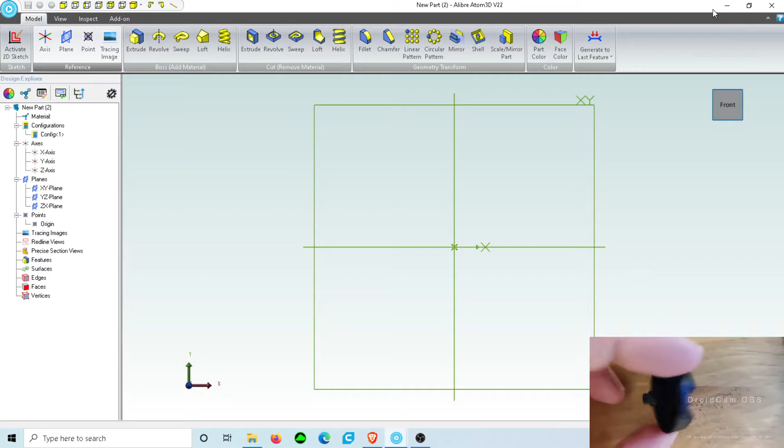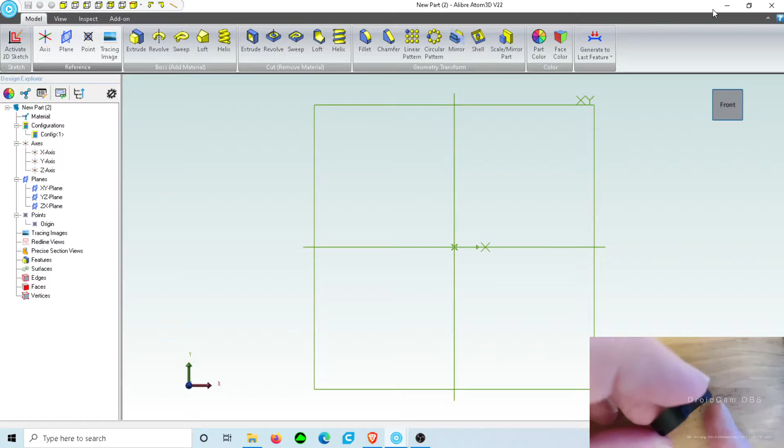The part we're modeling today is this D-pad hat thing. Came off, I think, an old Tartarus. It's not what the current D-pads look like, but really what I'm wanting to do is get the profile of this, because what I'm doing is I'm going to make a D-pad for a drop-in replacement for Tartarus and Orbweaver. So the first thing I do is trusty calipers.

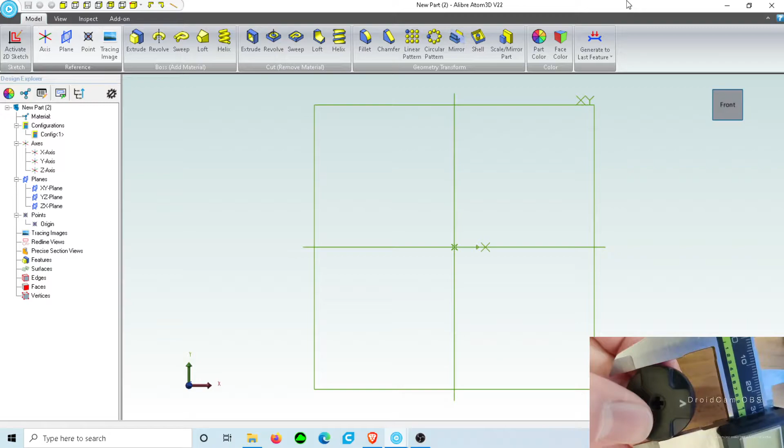Let's measure the diameter. We're at 27.6, so we'll just call it 28. We'll round up.

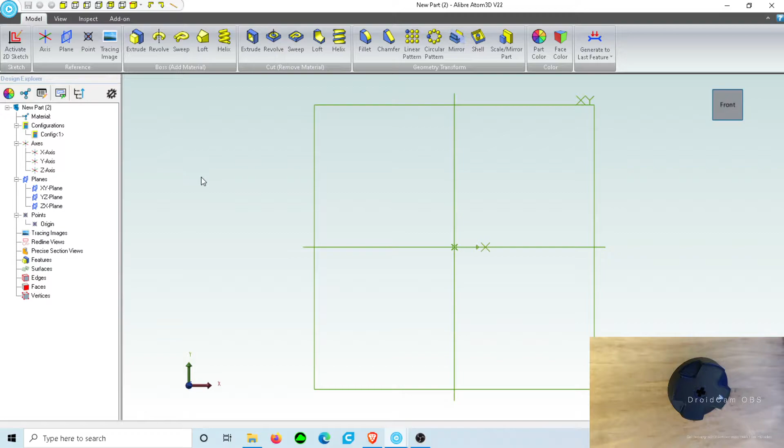And I'm going to make a sketch here. This is parametric 3D modeling, by the way, so a lot of the terminology that I use is going to be transferable between different apps. So I'm going to make a sketch on the XY plane, and we're going to start with a circle. There's my circle. And what did I say this was? I forgot already.

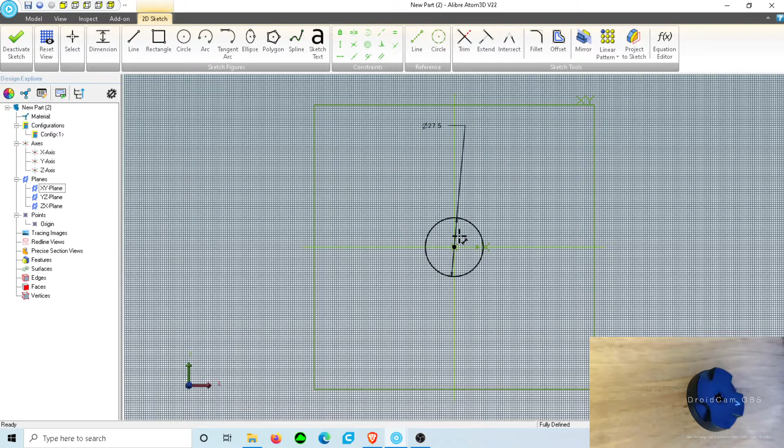28. We'll do 27.5, we'll keep it there. So I'm going to set a dimension on this circle at 27.5 millimeters. There, and that's the base.

And the way these parametric modelers work very often is you do 2D sketches, you constrain them, and then you extrude them to either add or remove material. So I've got this sketch here.

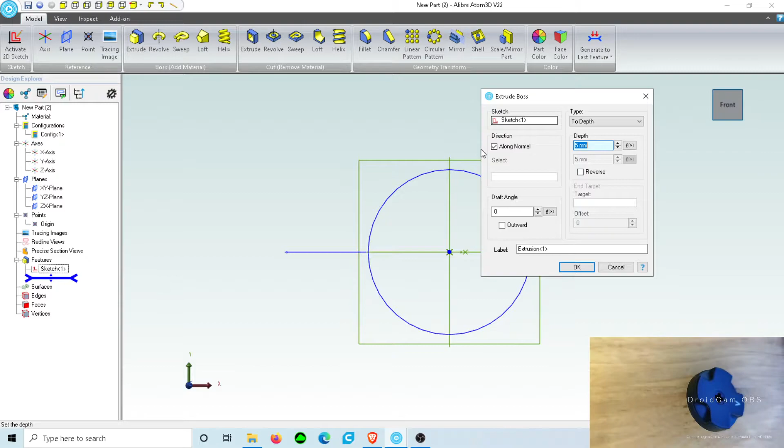Let's extrude this. And the thickness of this should be 6.87, 6.97, so we'll call it 7 millimeters. So it's 7 millimeters tall. And there we go.

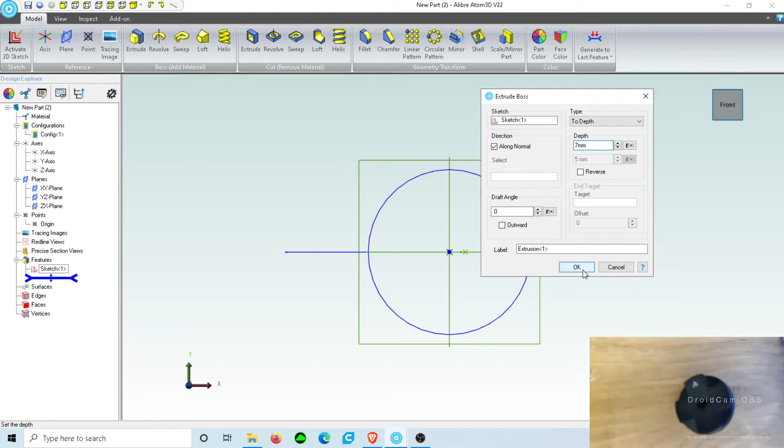You know what, nope, that's not right. I don't want the height of the full thing. I only want the height of this half before the risers — I'm not sure what else to call those — so let's just measure that. I did it the full height. I don't want to do it the full height.

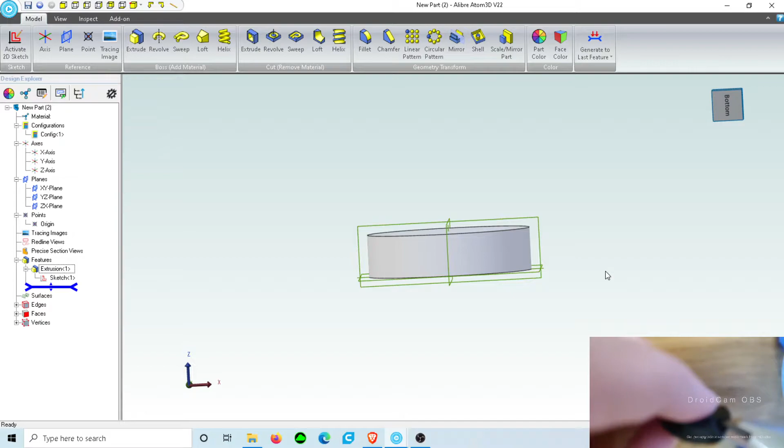Just measuring that, and it's 3.75. So let's just do that, 3.75. Let's change that extrusion. 3.75 millimeters, that's better. Now I want to put the up, down, left, right cross section on it.

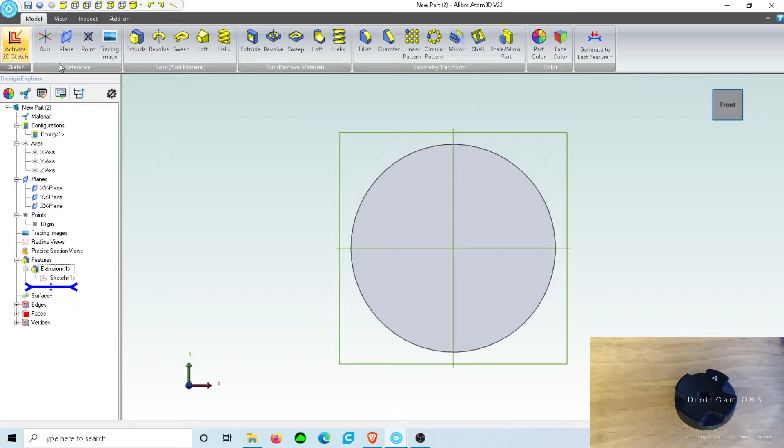So let's make a new sketch and put it on that surface on the top. And I'm going to do some sketching and then we'll measure. So I'm going to add an external reference to that profile, the circular profile, so now I can reference that. And we're going to go — this is a line — so I want it to look something like this.

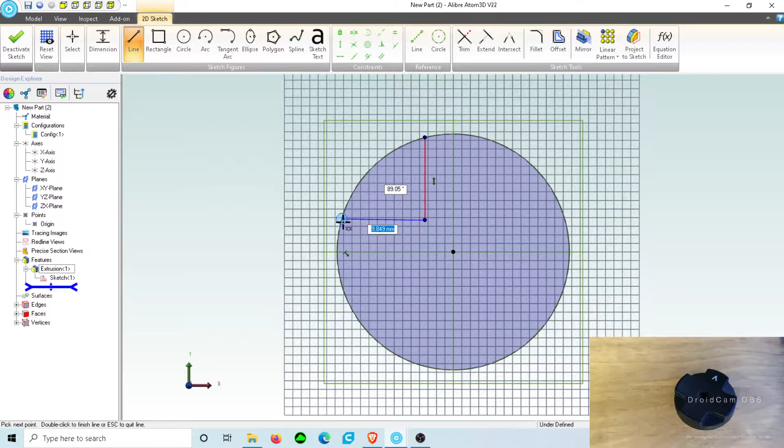Okay, so it added a bunch of constraints in there. I may not want all of those. Let's just delete all these constraints, because my one complaint so far with Alibre Atom is that when you sketch — maybe there's a way to disable it — it automatically adds constraints for you, and I do not like that.

I much prefer how FreeCAD does it. Oop, I probably removed one too many. Yeah, I much prefer how FreeCAD does it, where it doesn't add any constraints for you.

So I want to make all of these vertical. Let's select that, and bloop, bloop. No. But that's my only real complaint with this.

I'm making all these horizontal. FreeCAD had a lot of other things that I very much did not like, that kind of made it a non-starter. All right, those are still coincident on the circular thing. That's good, that's what I want.

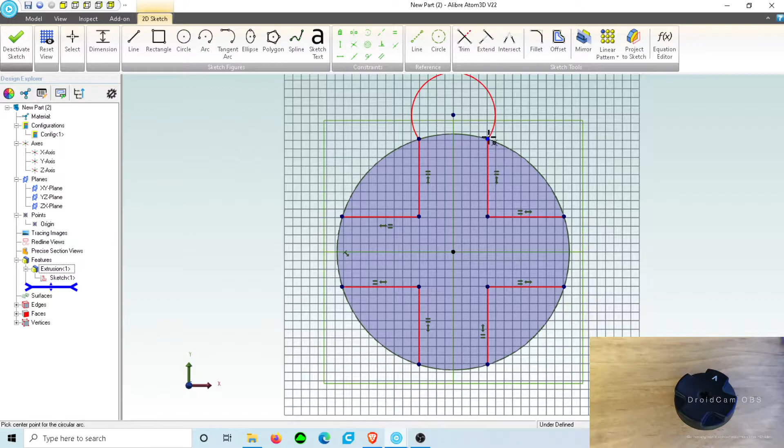Now I need to finish by putting arcs on those. So let's do that: center, left, right, center, left, right, center. I'm going to get this wrong now. Side to side, that side, that side. Now I've got these arcs.

Now I need to constrain them. One way to do it is to... oh, that was not ideal. One way to do it is to bring this radius in, but first let me actually set a length on these lines here.

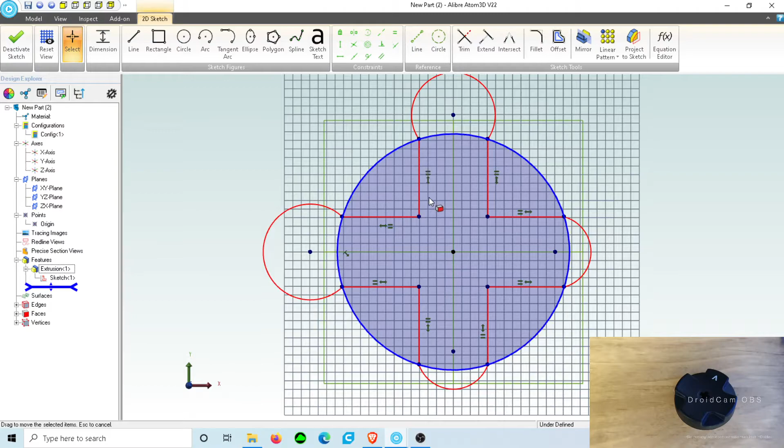So let's measure how thick these are. 11 millimeters, okay.

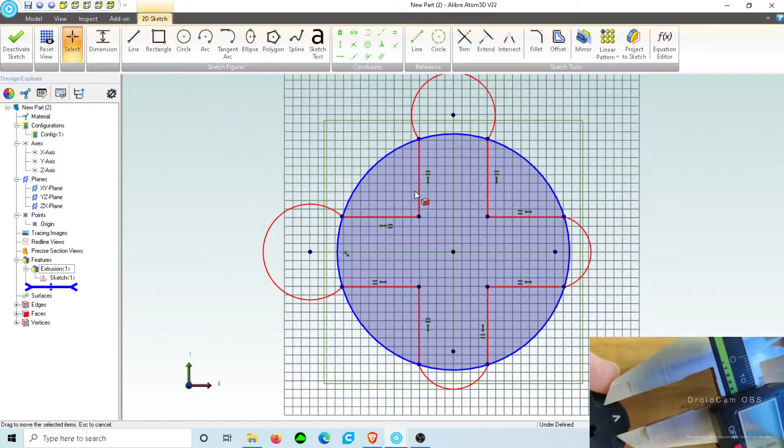I'm going to do it not by those. I'm going to watch this. I'm going to do it like this: a reference line from there to there, and I'm going to dimension this line. 11, and that should enforce.

It does, good. Now I should be able to more easily constrain these arcs without the whole sketch going crazy. So one way I found to do it is to coincide the radius, basically, to the center — the center point of this arc. Let's do that, let's try it.

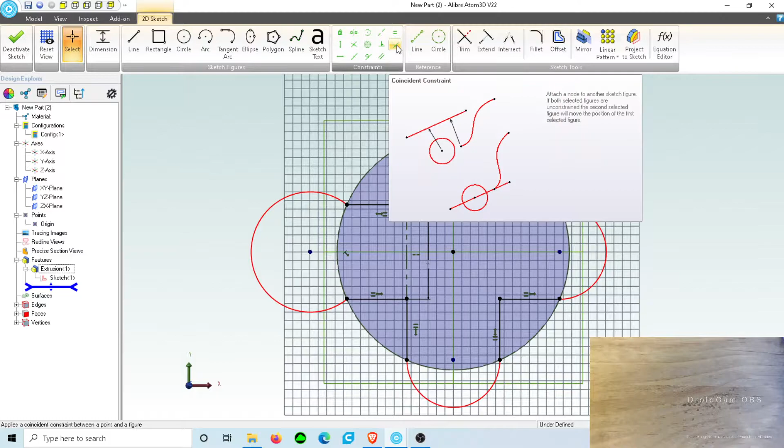Yes. Yes. That's working. And that's fully constrained.

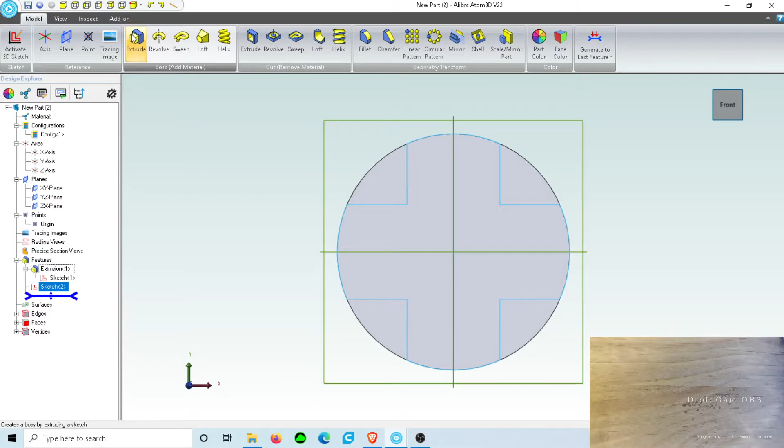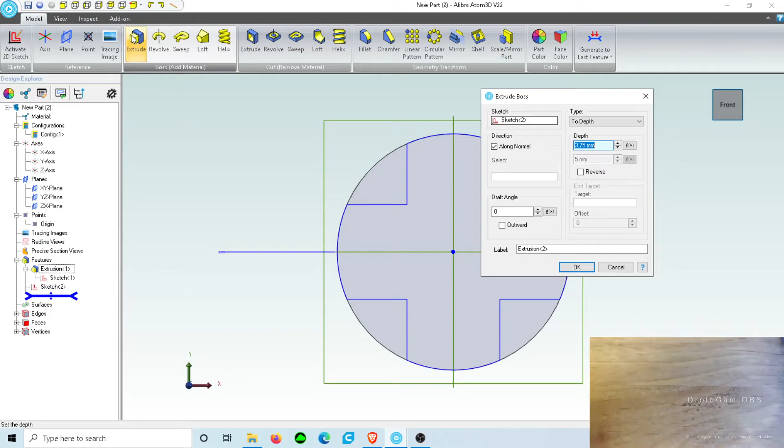So now I can now extrude that. And the full height was 7 millimeters, I think, is what we came up with. Yeah, we'll call it 7. So the difference between that was 3.75, so this needs to be 3.75.

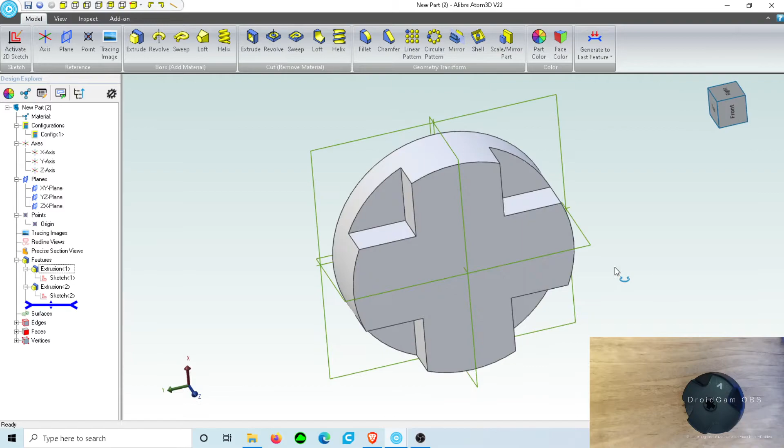Boom. And that's how that looks. So that's a good start.

Now what I would like to do is make this kind of curved profile. So if you notice on this D-pad here, it's not flat across the top. It curves in, it indents. So I'm gonna model that here.

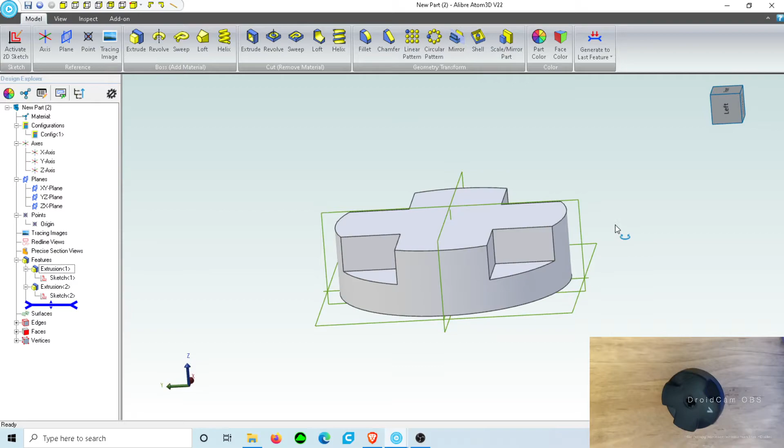One way to do it, I'm sure there are other ways, but the way I'm going to do it is revolve a cut. But that's perpendicular, so I'm going to put another sketch on this plane here, this YZ plane.

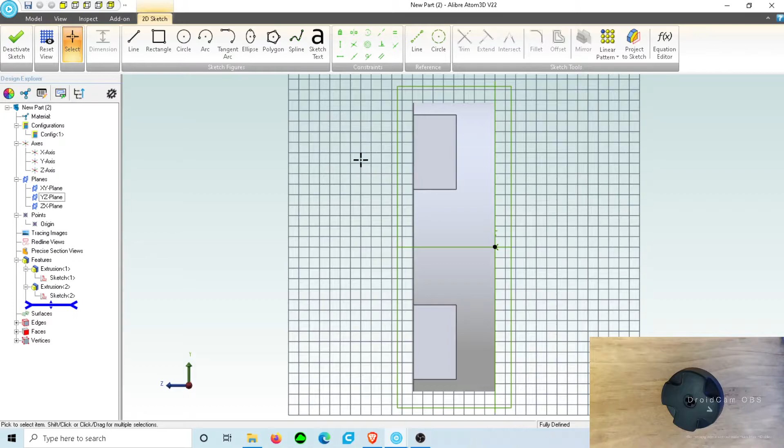And let's reset the view. Ooh, I did not like that. That's fine. Sometimes the camera can be wonky. It doesn't really matter overly.

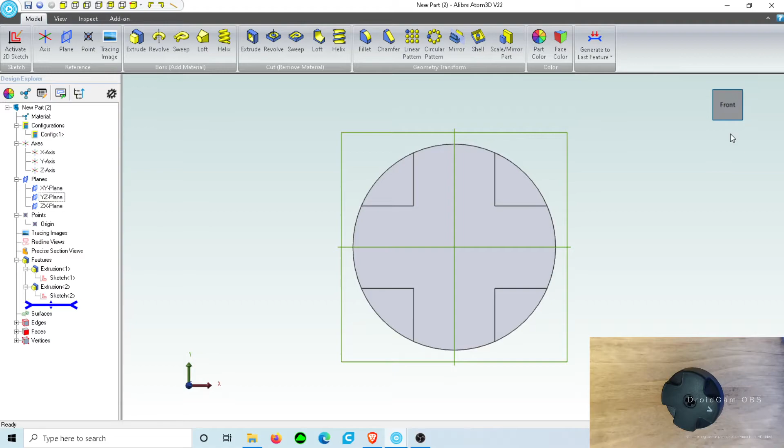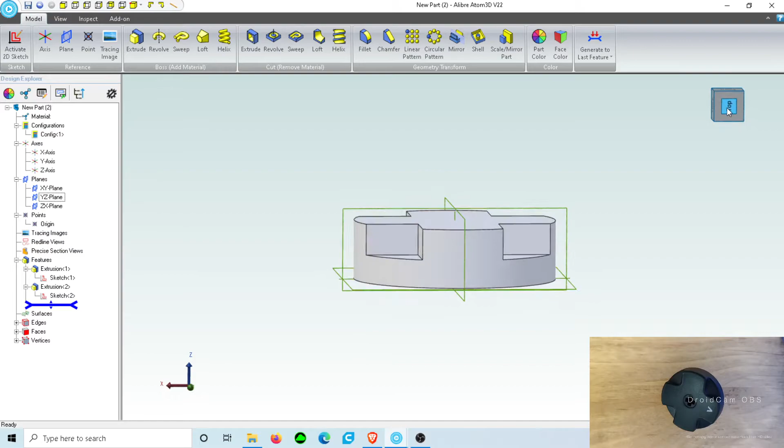Let's use these camera controls and try that again. Top, I believe, is what I need. Maybe. Let's just do it on that plane, it doesn't really matter. Okay, that's more what I want.

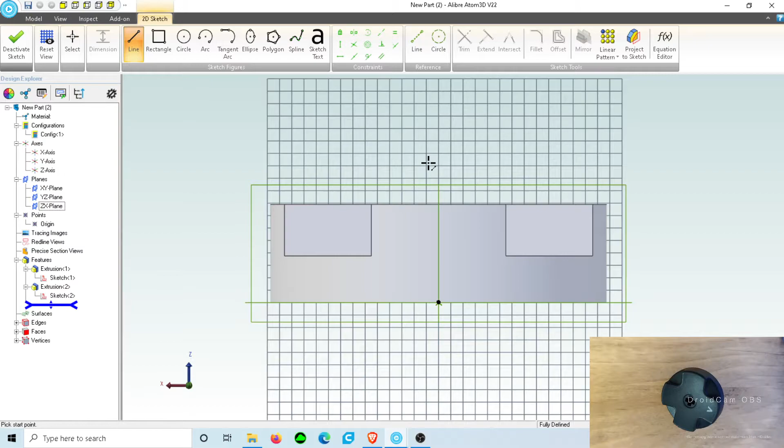I need to kind of scoop this out. So let's do a line, and then a line. I'm kind of making it wonky on purpose so it doesn't auto add those constraints for me. And then an arc.

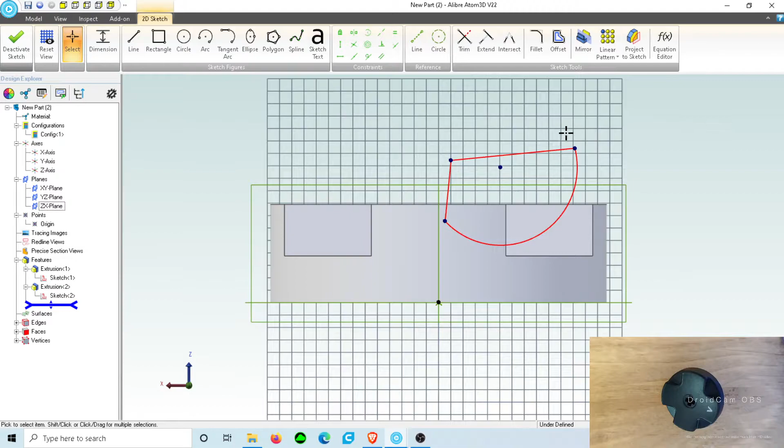Okay. Now what I need to do is bring in some reference.

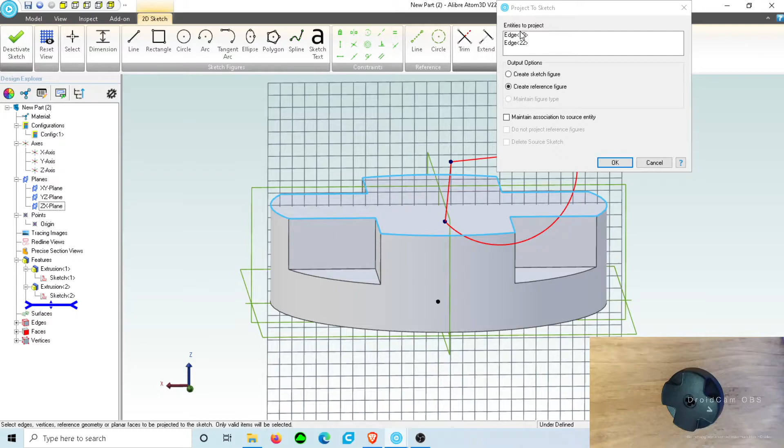What did I select? No, I don't want that. I only want this edge. Yes, okay, perfect.

So let's add some constraints. Let's make that vertical and let's make that horizontal.

And let's make the distance from center. Oh, what did I do? That's going to make it not what I want. That's what I want, horizontal distance is 0.

Okay, and then I want the distance from here to here to be 0.

Now I need to work on this arc here. Let's set a length on this. I believe it was 4.15. Yes, that's much better. Now I should be able to futz with it.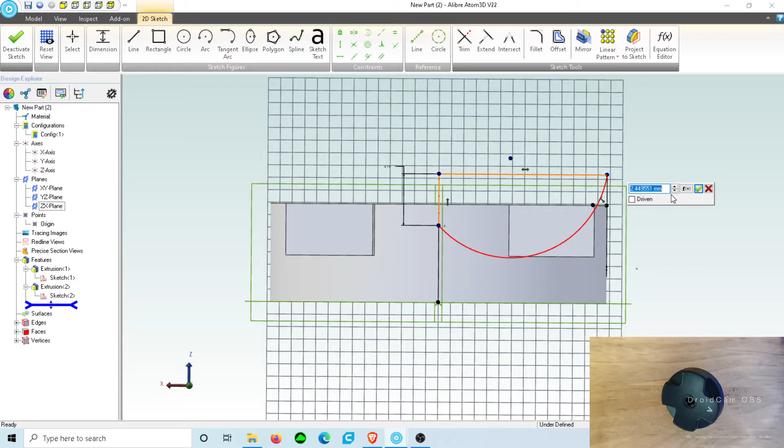Let's also set the height. Okay. Now I can mess with this arc.

Let's see if I can do this. So let's start by making this. That might have done it. Yep, okay cool.

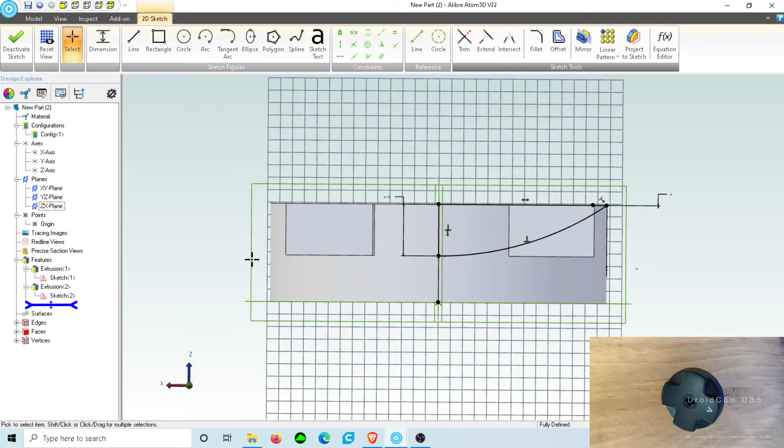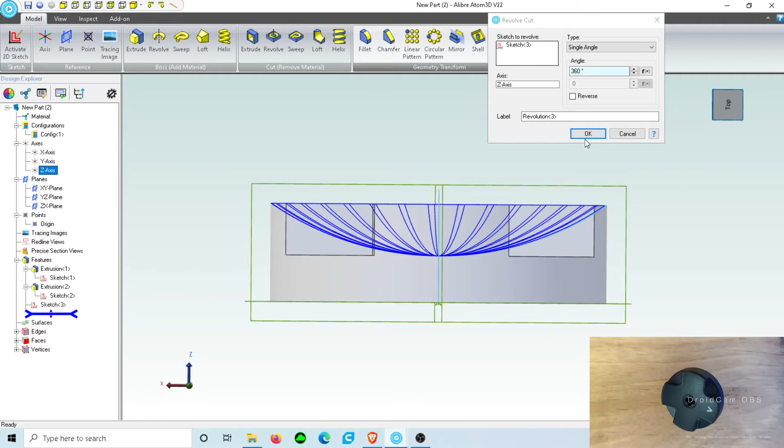Deactivate sketch. Now, instead of adding material, I'm going to cut and revolve it, using the axis. I believe I want the z-axis. And yeah.

That might have been too aggressive, but I can tweak that. You see, that's how I kind of cut out that section there. I can probably reduce the height. Let's do that, I'm not happy with it.

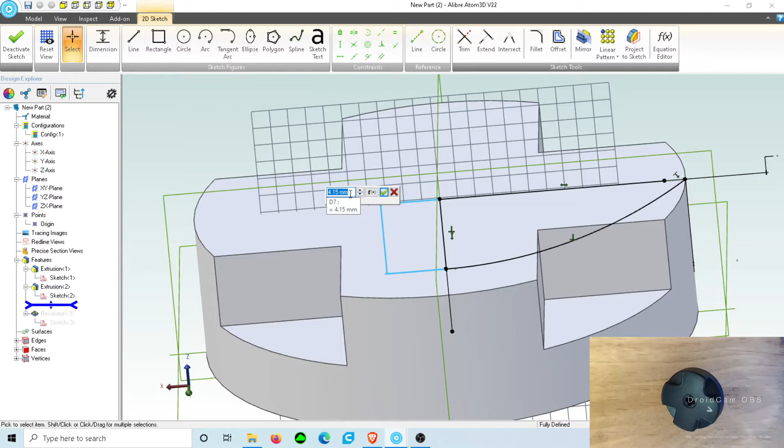All I need to do is come right here to this dimension and change it to like 3 millimeters to make that less extreme.

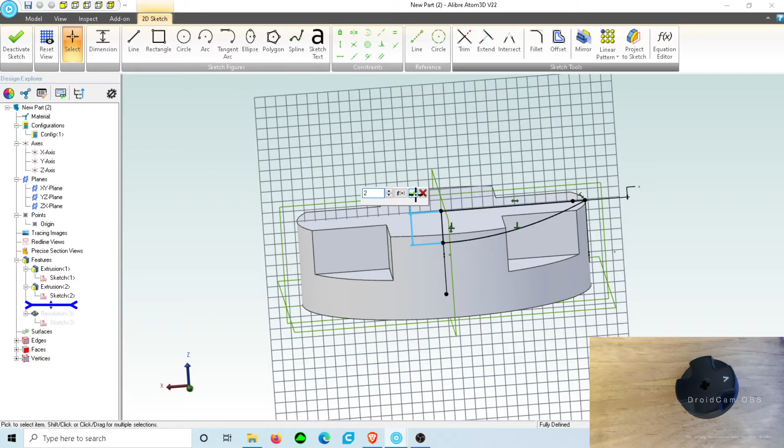A little more. Let's make it like a 2 millimeter cut. Yeah, that looks better. Cool.

There's a lot more detail that I could add here, but that's doing pretty good.

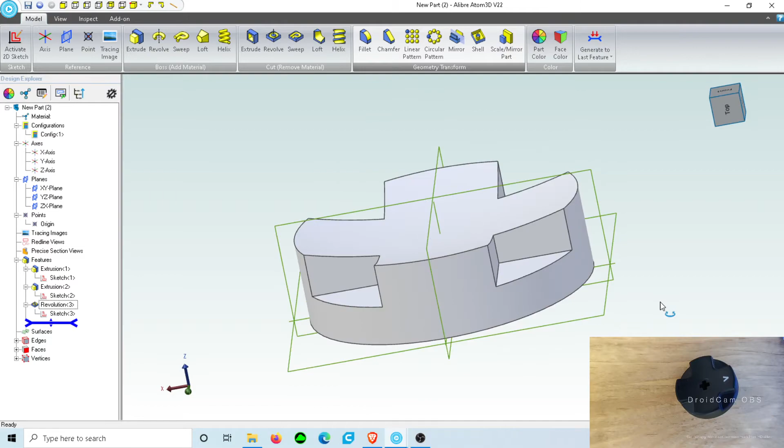Let's put a screw hole because I'm planning on putting a screw in this. So let's just do a new sketch on the XY plane.

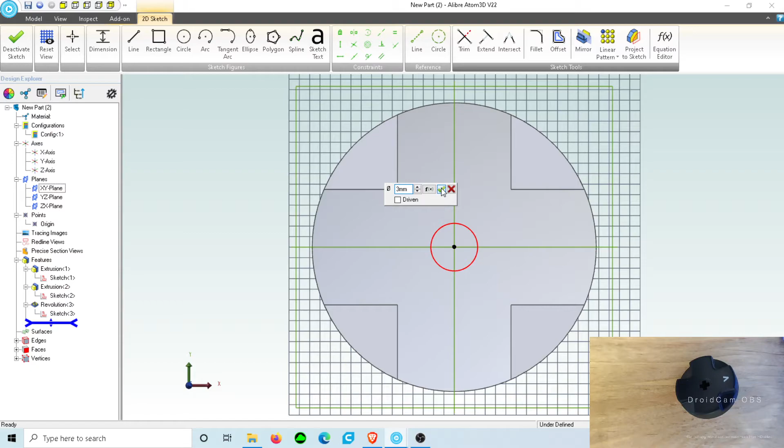Reset the view, and this is easy, just a circle. I know that my screws are M3 bolts, so 3 millimeter for the screw post, like for the hole itself.

And let's cut that through all. All right, and then let's countersink that head.

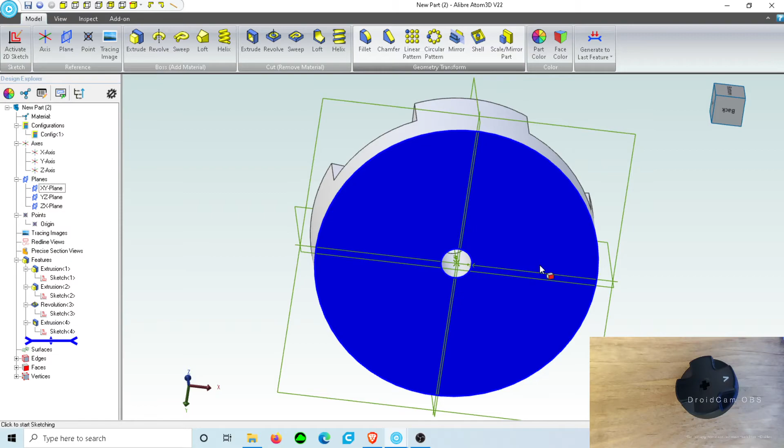Again on the X, no. I gotta be more careful with this. It will not let me put one on this surface, I bet. What's going on? That's why, okay, because yeah, this is a non-planar face, which means it's not flat.

So what I need to do is actually make a plane. I'm going to reference a plane, I'm going to offset it. I'm going to set it on the XY plane, but offset it.

I could do this much more exactly, but we did 3.75 plus 2, so that's 5 point something. I'm close, let's see if that does it.

So now I can sketch on that plane. Let's see if this works. Activate sketch on that plane.

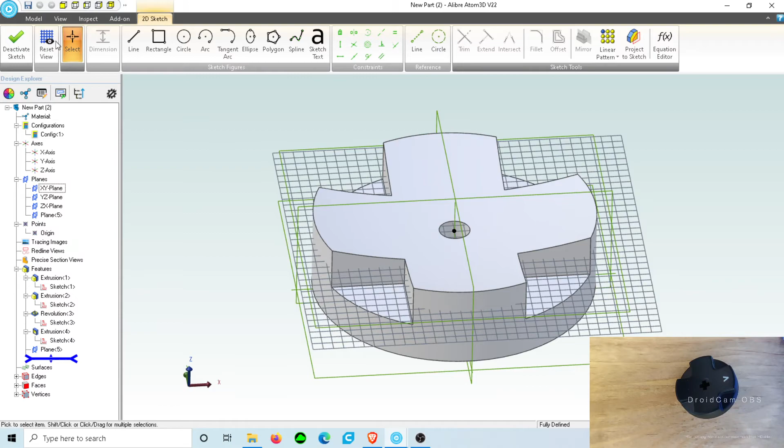Is that at the right height? I don't know, let's find out. Let's make another circle.

And the head of these screws, I'm going to make up a dimension because I don't know what it is. I think it's like, let's just say it's 5 millimeters because I'm not sure, but you'll get the idea.

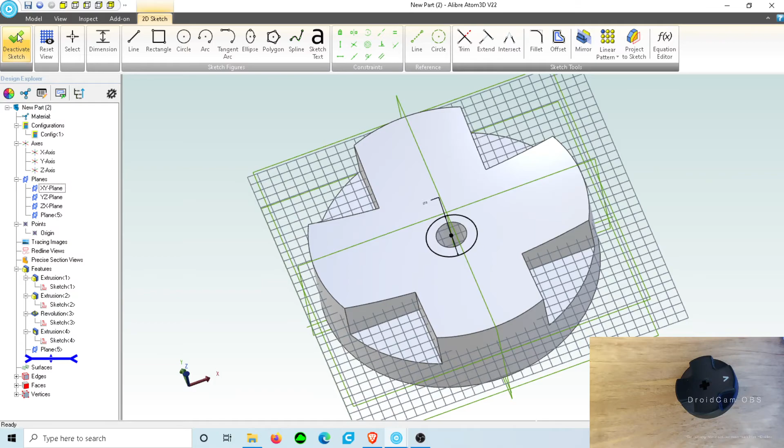And then let's extrude that down by, I don't know, 3, I think that should be enough. But reverse it.

Yeah, I need to bring that plane up a little bit. Let's bring that plane up and redo that. Okay.

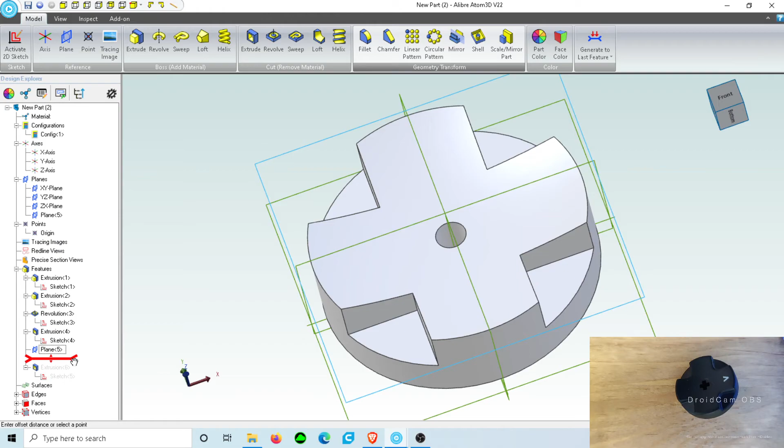That might be too deep, but you get the idea. I'll be able to countersink a screw in there.

And just for giggles, let's cut out the bottom because I don't want all that material on the bottom. Let's circle and...

I believe we made the main base 27 millimeters. So let's give it a 2 millimeter wall, which means you need to make it 4 smaller, so this needs to be 23.

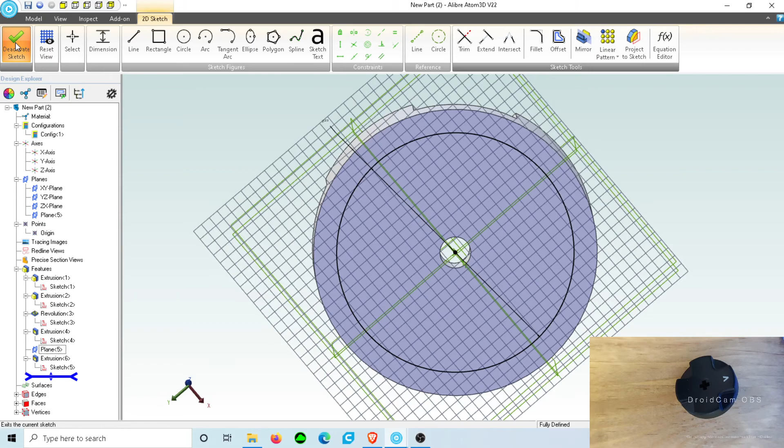Okay, and we'll just cut that up by, we'll cut that up by 1.5.

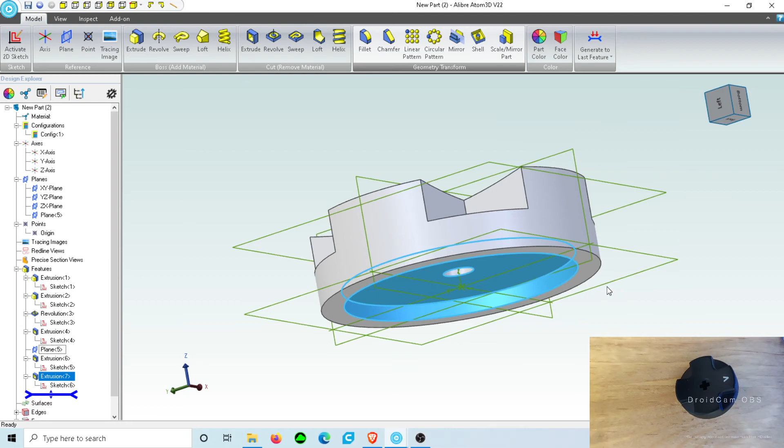Okay, and that's a really basic D-pad hat.

Just for the sake of brevity, there are some things I'm not going to do in this video, but I would angle 4 different planes for each of these surfaces and put like a different symbol so we know which way is up, left, right, down.

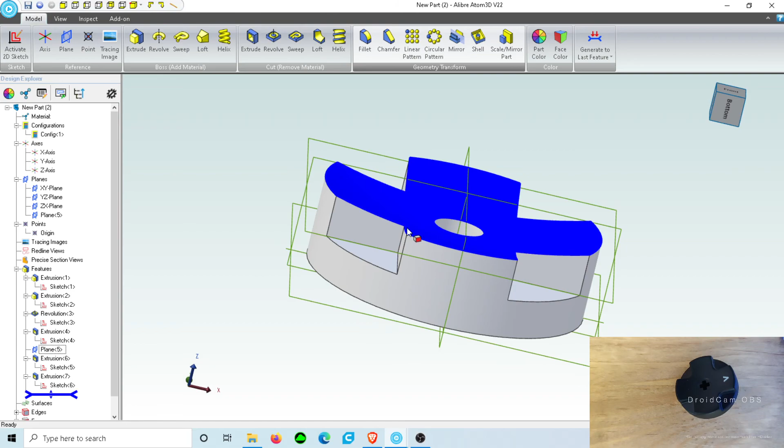And then I would need to make probably some sort of harness or box on the bottom for the post to fit into, to be screwed through. But otherwise, this is basically done.

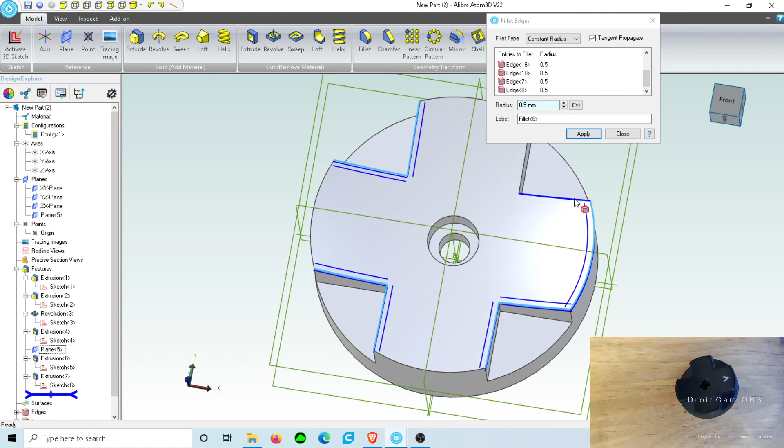And then you can do fun stuff like add some fillets, make all these edges nice and rounded, like that. You could do stuff like that.

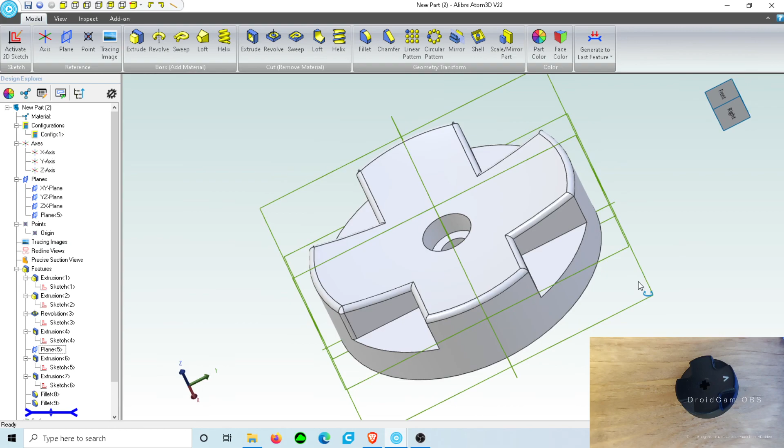Yeah, so that's how I model parts. I hope that makes sense. Hope that helps you. I find that I can get really dimensionally accurate stuff this way.